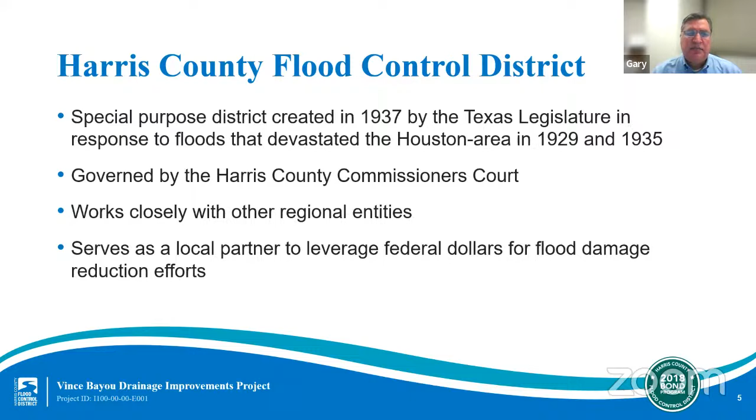The mission of the Harris County Flood Control District is to provide flood damage reduction projects that work with appropriate regard for community and natural values.

One of the most difficult challenges we face is constructing effective projects that are sensitive to community and natural values in a highly urbanized area.

Harris County includes 23 main watersheds, totaling approximately 1,800 square miles and more than 2,500 linear miles of channel. 2,500 miles is approximately the distance from New York to California.

A watershed is a geographical region of land that drains to a common channel or outlet. Each watershed has its own unique characteristics and needs. The project we are presenting tonight is in the Vince Bayou watershed, which is located in southeast Harris County.

Harris County and our surrounding area is flood prone for a number of reasons. Namely, we experience extreme rainfall events, including tropical storms and hurricanes.

Our area is largely made up of flat, slow draining land, and we see large concentrations of clay soils that do not soak up excess rainfall quickly.

While the Flood Control District plays a critical role in flood risk reduction, we are one of several entities involved in these efforts in our region.

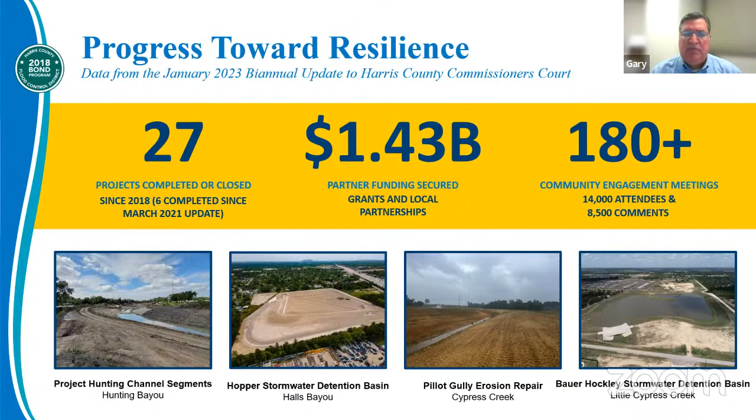Your input continues to be critical to our efforts. We'll continue these biannual updates moving forward to share progress on the program.

While the bond was for $2.5 billion, the full cost of every project in the bond tables is almost $5 billion. So we made it clear from the outset that we would need funding partners to fully construct the projects in the bond program. As I mentioned, we've had some success so far, having secured more than $1.43 billion in partner funds for projects across Harris County.

We will now move into the part of the program that is specifically about the Vince Bayou Watershed and Vince Bayou Drainage Improvements Project. As a reminder, we are looking for your input as we discuss the project in more detail. Please feel free to drop any questions or comments into the comment box or to comment via phone by pushing the star key.

The Vince Bayou Drainage Improvements Project aims to reduce the impact of flooding throughout the Vince Bayou watershed through what are expected to be multiple channel conveyance improvement and stormwater detention basin projects along the main stem of Vince Bayou.

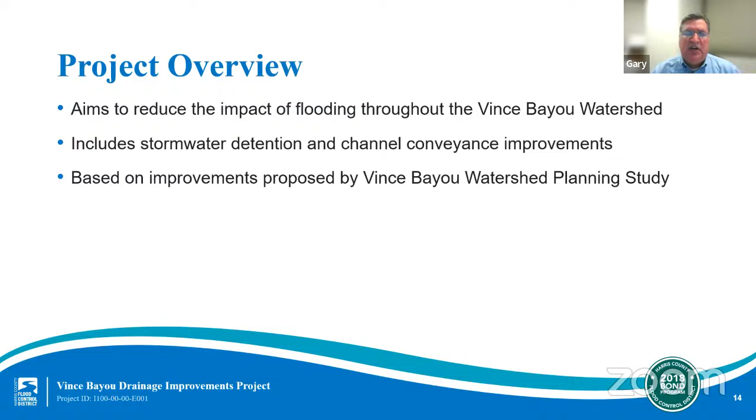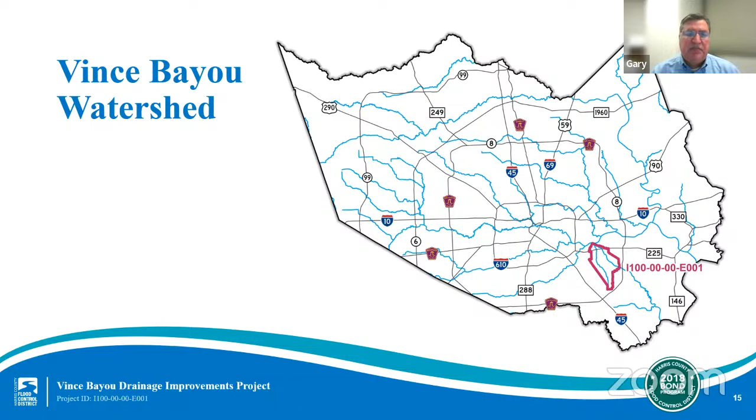The map on this screen shows the project boundaries for the Vince Bayou Watershed Planning Study in red, which was the entirety of the Vince Bayou Watershed. Vince Bayou Watershed covers about 16 square miles and includes two primary streams, Vince Bayou and Little Vince Bayou. Vince Bayou flows from Genoa Red Bluff Road to the Houston Ship Channel, and Little Vince Bayou drains the remaining third of the watershed. There are about 19 miles of open streams within the watershed, including the primary streams and tributary channels.

There are a few key characteristics of the watershed to keep in mind as we move forward in our presentation. Over 95% of the land in the watershed is considered flat or very flat. The watershed is highly developed with very few open areas of significant sizes. The majority of the main channels for Vince Bayou and Little Vince Bayou are man-made and primarily concrete lined. There are some tributaries to the primary channels which are grass lined, but these are more like drainage ditches.

This planning study investigated flooding problems, identified ongoing and proposed flood mitigation projects, and evaluated and recommended potential projects to reduce the risk of flooding in this watershed. This effort resulted in a watershed-wide plan for major stormwater infrastructure improvements. Taking a watershed-wide approach to planning ensures that future flood risk reduction projects work together and are sequenced appropriately to achieve the maximum benefits.

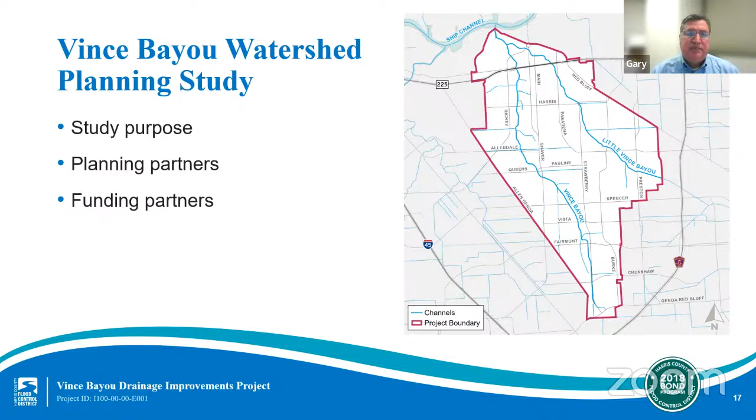Before we get into the study findings, I want to take a few minutes to cover some of the terms we will be using. Some of these you may have heard, but I think it will be beneficial to clarify some of the terminology. Throughout the presentation, we will be using terms like 100-year event and annual chance event. I want to clarify what that means.

A 1% annual chance event, or 100-year event, is a rainfall event that has a 1% chance of occurring in any given year. That doesn't mean that if you have a 1% annual chance event this year, you are good for another 100 years. It is simply a measure of the expected frequency based on the historical data that we have. By the same token, a 10% annual chance, or 10-year event, is a rainfall event that has a 10% chance of occurring in any given year.

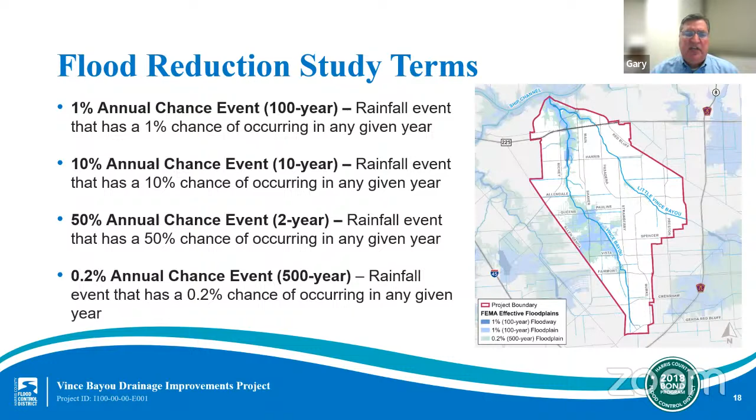There are multiple sources of flooding in the watershed, including local stormwater drainage limitations, which are caused by insufficient storm sewer inlets, an undersized storm sewer network, and/or a lack of overflow outlets for extreme events. Diversions of sheet flow or channel overflow from adjoining watershed areas caused by insufficient drainage systems or channel capacity in the adjoining watershed areas.

And finally, channel overbank flooding due to insufficient channel conveyance capacity of Vince Bayou and its tributaries. The clusters of historic flooding claims and possible flooding sources were carefully studied to identify various localized problem areas in the watershed. By determining where the most severe flooding problems exist, we help to ensure that our proposed flood reduction strategy benefits the most people within a limited budget.

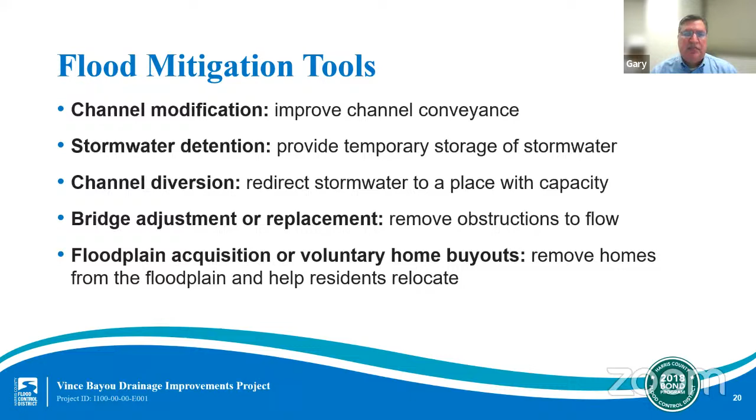The proposed flood mitigation strategy from the watershed planning study for Vince Bayou consists of stormwater detention basins at 5 different locations throughout the watershed, with associated channel widening at 2 of the proposed basins. The detention basins under consideration are generally located near the Vince Bayou main channel in the upper reaches of the watershed above Spencer Highway. Channel widening is proposed at 2 of the 5 detention basin sites for a combined widening reach length of about 0.7 miles.

Combined, the 5 basins would be able to detain approximately 233 acre-feet of flood volume. Since the recommended project includes multiple components, we have flexibility in execution. The basins can be combined into a single project or a combination of multiple projects, since these basins are generally independent of one another.

Let's take a moment to further explain how stormwater detention basins work in flood mitigation. Stormwater detention basins provide storage for runoff of floodwaters. This storage is temporary and prevents water from overwhelming channels. When channel stormwater levels drop back down, the stored stormwater drains back into the channel by gravity via outfall pipes appropriately sized to drain the basin.

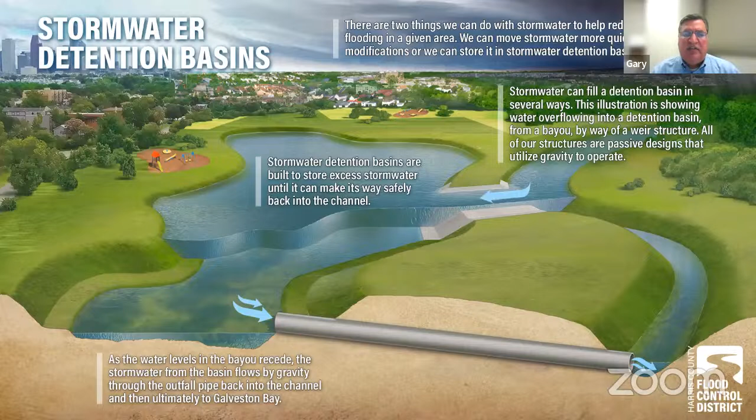While all stormwater detention basins essentially function the same way, they can be designed in many different configurations. Stormwater detention basins can be designed as either wet bottom or dry bottom. Wet bottom basins feature a permanent pool of water at the bottom of the basin. The area from the top of the water to the top of the basin's banks is available for additional stormwater storage. Dry bottom basins are grass-lined and are designed to drain dry between rain events. We are pursuing dry bottom basins for this project.

When we talk about stormwater detention basins, we talk about how much stormwater they can hold in a unit of measure called acre-feet. That measure refers to the volume of water 1 foot deep over 1 acre. For context, 1 acre-foot equals 325,851 gallons.

Think of 1 football field covered with 1 foot of water. Combined, the 5 proposed basins proposed by the Vince Bayou Watershed Planning Study would be able to detain approximately 233 acre-feet of flood volume. This total capacity translates to roughly 75 million gallons, or roughly 230 football fields of storage.

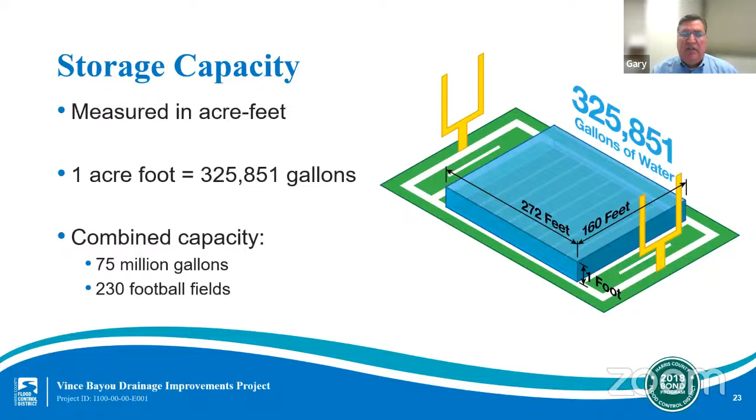Preliminary engineering is an important stage in the development of a project in which we conduct a detailed evaluation of the potential projects. During this stage, flood control district engineers and environmental specialists develop and evaluate possible alternatives for the identified project to meet flood damage reduction goals.

This includes analyzing the benefits for the 5 stormwater detention basins identified in the watershed planning study and prioritizing the projects for implementation accordingly. Ultimately, one project is recommended at the conclusion of this project stage in a document called the Preliminary Engineering Report, or PER for short.

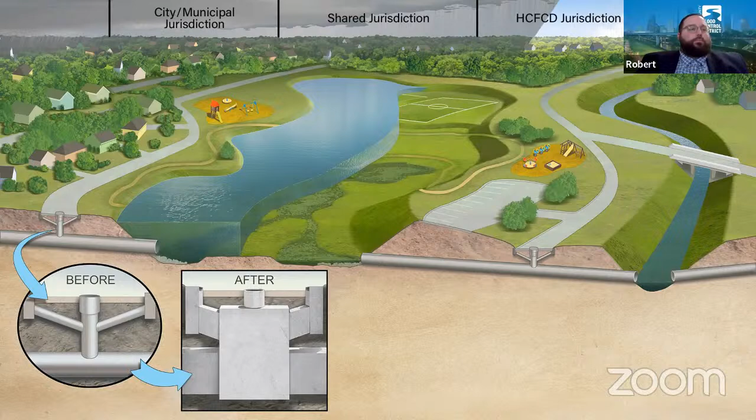Right. So it depends, and it gets sort of complex when we start talking about water overflowing from one watershed to another. In general, when we have underground storm sewer systems, those systems were designed and built to take water in one particular direction. But in the case of heavy rain events, when you start to get ponding in streets, if those storm sewers get overwhelmed, sometimes when you get higher water and ponding in the streets, that flow can go in different directions, and it can spill over from one watershed divide to another. Gary talked in the presentation about how flat this area is, and that's a consequence of very flat land. Sometimes that water can sheet flow over into a different watershed.

The watersheds surrounding the Vince Bayou watershed are Sims Bayou to the west and Armand Bayou to the south. And there are smaller tributaries to the Houston Ship Channel to the east. So really all of these adjoining watersheds have the potential to overflow into the Vince Bayou watershed during some of these major storm events. The Flood Control District does have numerous projects underway in all of these adjoining watersheds, and you can learn more about those projects on our website.

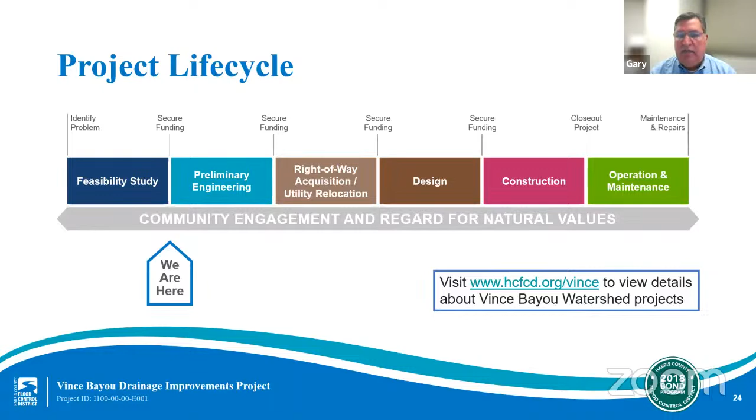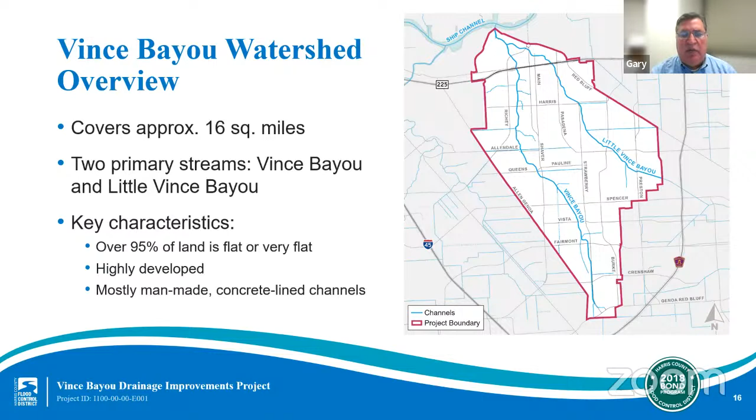Yeah, I'll take that question. Yes. So if you go back to the discussion about where these projects came from, which was the initial feasibility or watershed planning study, we studied the entirety of the watershed. We identified where we felt the flooding issues were associated with local drainage issues. We did identify some areas where water is spilling from adjacent watersheds into Vince Bayou. We also identified where the channel would get out of banks because sections of the Vince and Little Vince systems were undersized. So when that water gets out of banks, it tends to go overland, creating a floodplain, and in some areas it may transfer water from Vince Bayou main stem to Little Vince Bayou. So water is moving throughout the watershed.

So the reason we identified the projects going to the PER is they scored out as the best of the projects we looked at, keeping in mind we have a specific budget within the bond ID to move forward. So we selected the projects we felt would give us the most benefits relative to the entire watershed. There are other projects we're still looking for funding for, that at some point we'll have to figure out how to move forward with.

But for the ones currently moving forward, we're targeting detention and limited channel in the upper portion of Vince Bayou, because by holding and collecting that water, we get benefits that continue downstream, and we're able to contain water that under large events such as the 100-year or larger, would currently spill out and potentially make its way through neighborhoods trying to get back into a channel. So right now, for the projects moving to PER, the basins we talked about with the limited channel are all in the upper portion of the main stem of Vince Bayou.

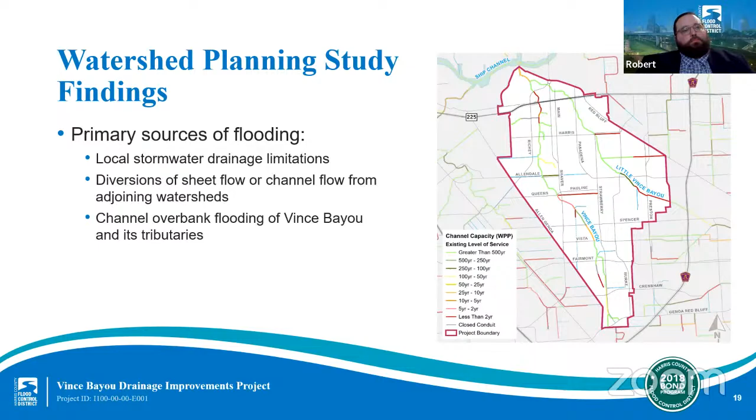Yeah, great question. That's always a hot topic as we start our discussions and meetings in the preliminary engineering stage. Really, there's several factors that go into deciding whether a basin is more advantageous as a wet bottom or a dry bottom basin. It's one of the things we look at in our preliminary engineering studies at this stage to weigh the options and look at different alternatives. Wet versus dry is one of those.

Generally, we look at the shape and size of the basins, the depth, and how a basin connects to the channel. Things like soil type matter, the level of the water table, all things like that. We take that in and weigh that information to figure out what's the best configuration of the basin.

With all that said, in this watershed, really the biggest factor for us is the proximity to big airports. Both Hobby and Ellington are pretty close, and we have close coordination with the Houston Airport System. Designing and building wet bottom basins in these areas close to these airports can be a hazard due to waterfowl. So we decide when we're close enough to the airports to not construct something that could provide those attractants to waterfowl. We keep it as a dry bottom so as to not have that wet feature in there.

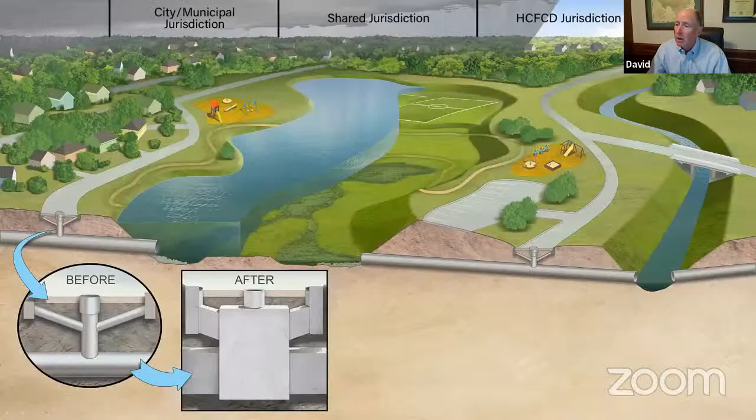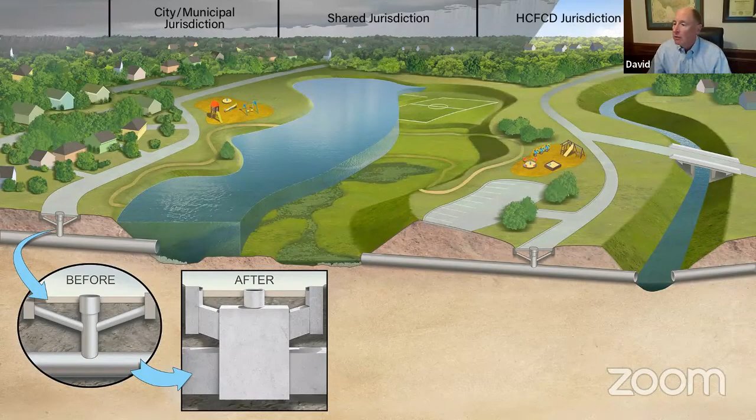Thank you, Robert. Yes, they will in a beneficial way. The homes along the bayou are the most impacted by the flooding that is unable to be carried by the channel, so they're the primary ones that benefit from the recommended detention and channel improvements. There are some impacts associated with construction, of course - dust, noise, and potential environmental impacts in those areas - but those are temporary during construction, and we don't feel there will be significant impacts burdening these homeowners.

Thank you, David. This next question is also for you. Will the detention basin construction impact existing trails along Vince Bayou?

Probably not - this is the simple answer. The current channel improvements are expected to be accomplished within the existing right-of-way, and the detention basins, of course, have to be connected to the channel. So there are inlet and outlet facilities, as shown on the slide, that will have some temporary impacts to the channels, but that's really the primary impact.

Thank you, David. Our next question is for Jonathan. Jonathan, can you explain the benefits expected from the recommended improvements?

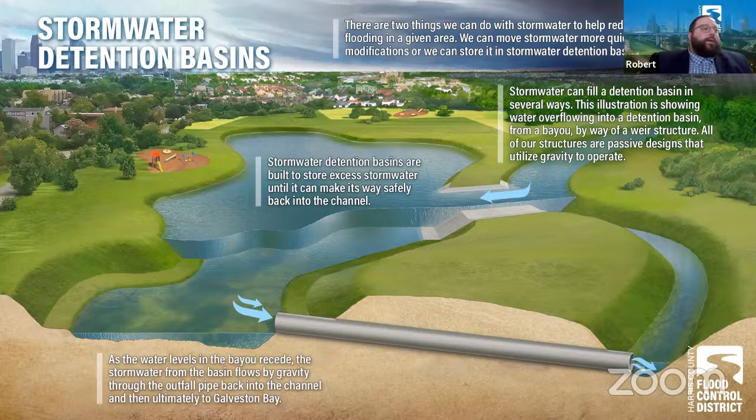Thank you, Jonathan. Our next question is for Gary. Gary, how do you determine which recommendations move forward?

Yeah, that's a great question, and it's really the primary purpose of the PER. Again, we began all this with a feasibility study to identify options. And during the PER phase, additional engineering analysis and environmental assessments are going to be conducted, designed to provide a lot more detail and a better idea of the cost of all the different detention sites we were trying to evaluate, as well as recommendations for limited channel modifications.

During this PER process, the engineers are actually looking at sites, looking at utilities, looking at pipelines that might be there that maybe we didn't pick up in our planning study. As they start adding all that in, they get a much better idea of what each of the different detention facilities could benefit and do, and then they also have a better idea of the cost.

As they work through the PER, they're going to start looking at all of the components that we pushed forward, and they're going to select the ones where we get the most benefit in the watershed, keeping in mind that we have a limited budget—the 2018 bond provided $15 million, as we've previously discussed. So they're going to take all of that together to say, okay, what can we actually construct? What are the benefits? As they work through that and get more detail, they'll have future public engagement meetings that will provide a lot more details about where they're at and what the project's starting to look like.

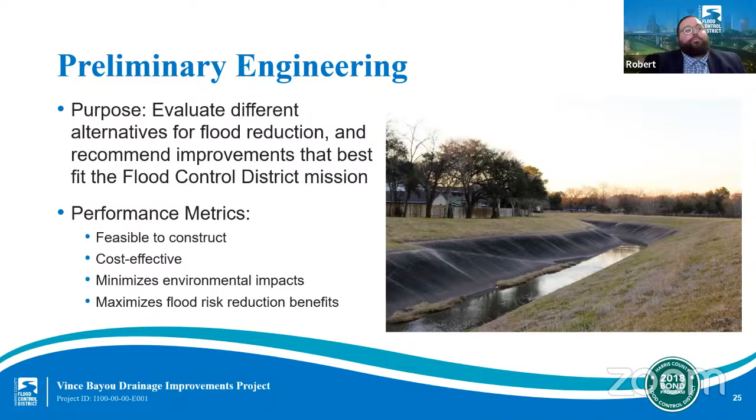So in the engineering PER process, we'll evaluate this in more detail. There was initially done as a part of the feasibility, and I'll answer the second part first. The channel conveyance is modeled using hydrologic and hydraulic, primarily hydraulic mathematical models to determine where they have limited capacity or need to be expanded.

Not all of the detention areas have channel improvements recommended for them. As Gary suggested, the only areas where channel conveyance improvements are recommended are areas shown by the mathematical models to need additional capacity or hydraulic conveyance added. At all of the detention basins, there are inlets and outlets that have to be connected to the channel, but the channel itself will not necessarily undergo any significant changes.

All of that will be evaluated further in the PER process. All right, thank you, David. Our next question is also for you, David. How long will it take to construct this project?

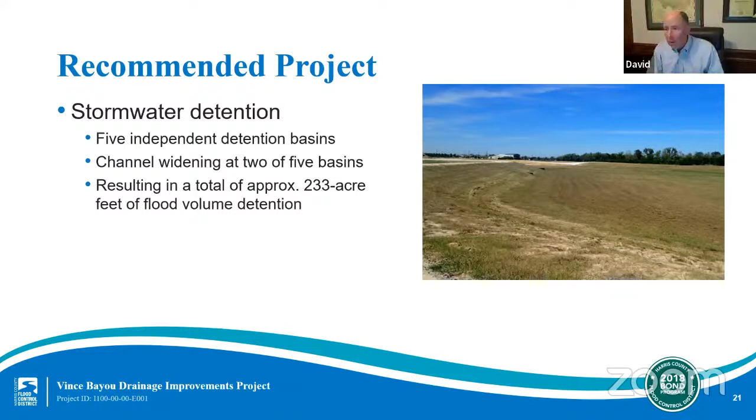Well, that's really not determined at this stage in any detail. That will also be a part of the PER process to evaluate property acquisitions, utility relocations, any environmental mitigation, environmental permits required, and that will establish more than anything the length of time this entire process will take. Construction itself is typically a one-year process, but again, that's too early to tell because there may be complications.

Of moving utilities or dealing with unexpected underground conditions that have to be evaluated. So all of that is subject to the PER team's recommendations. All right, thank you, David.

Our last question of the evening is for Gary. Gary, if Vince is primarily in the city of Pasadena, why was coordination with the city of Houston necessary during the planning study?

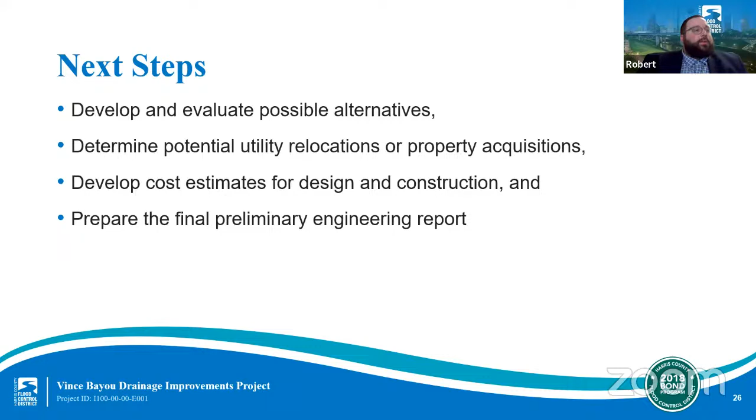Yes, the simplest answer to that is that when we did the watershed planning study, we were looking at the entire Vince Bayou watershed. There's a small portion of Vince near the ship channel and in the upper part of the watershed that is within the city of Houston's jurisdiction. So when we were doing that study, we tried to make sure we were coordinating with any potential future partners, trying to see if any of them have any specific information or data we could use in our study. So the reason we coordinated with the city was just very clearly because there are city limits within the limits of the watershed.